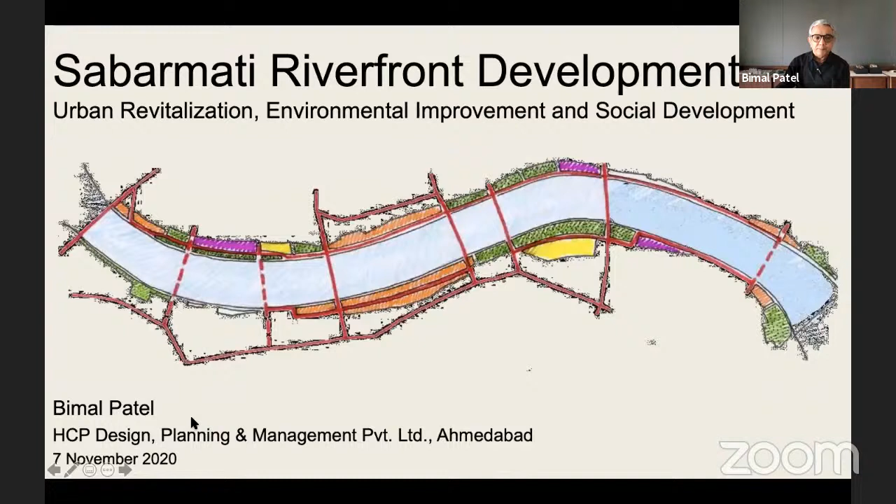So before I start on this project presentation, let me first say something of great importance. Every city is different and every waterfront is different, so I don't want anybody to believe that what was done here can be completely replicated elsewhere. And yet many problems that our cities face, many problems that our rivers and waterfronts face, and issues we have to work on are similar. Therefore, there are also lessons from here that might help in tackling other rivers, other problems in cities.

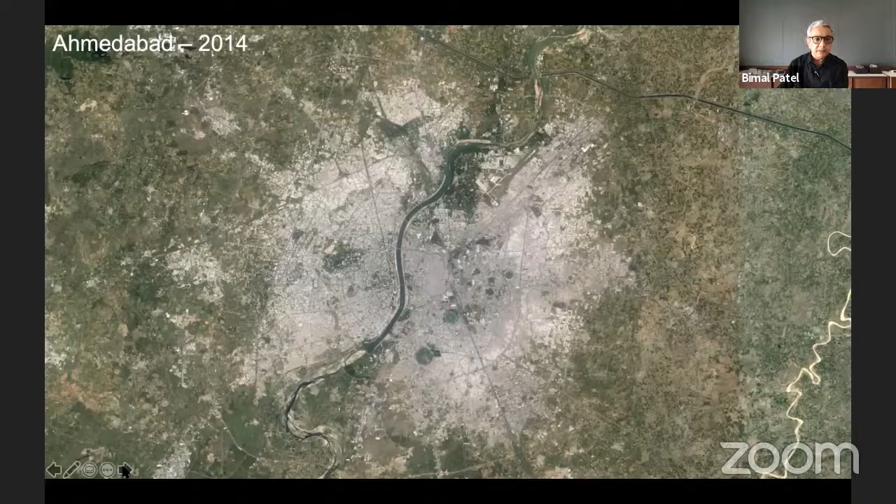The river has always been a place for recreation. This is Shah Jahan's palace on the bank of the river in Ahmedabad.

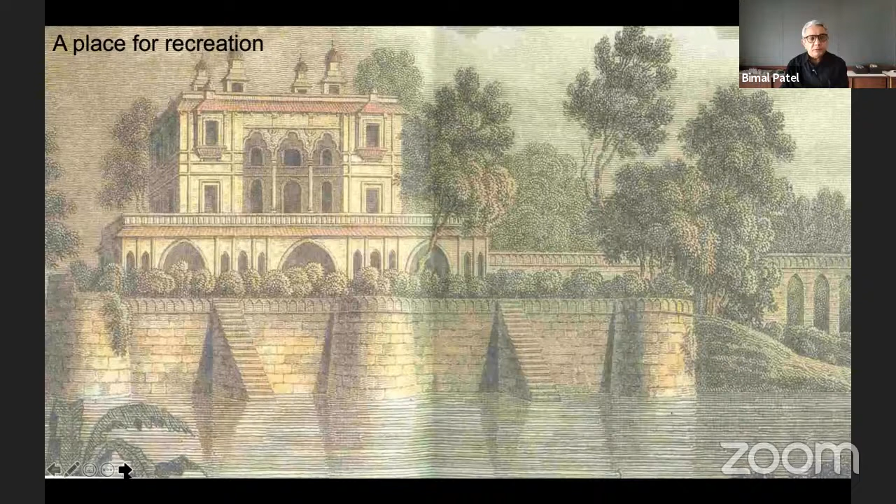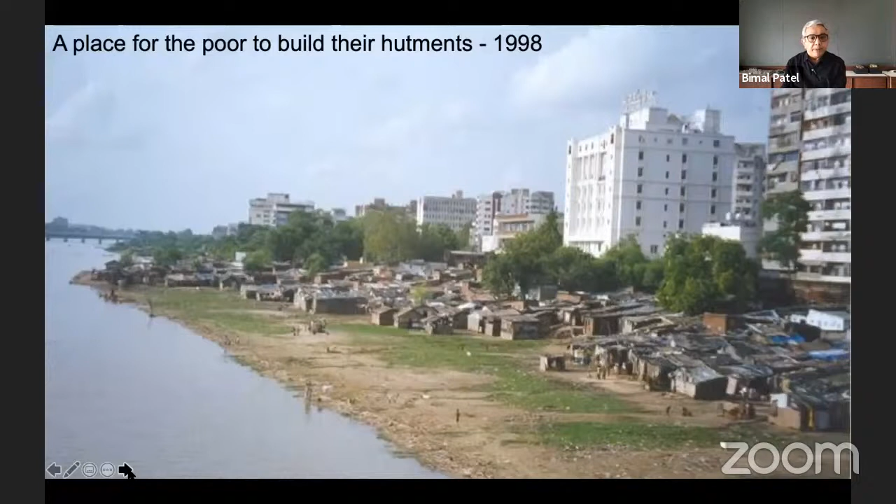Gandhiji built his ashram on the banks of the Sabarmati River. So the Sabarmati River is significant not just for Ahmedabad but also for the country as a whole, because this is where the freedom struggle was forged from.

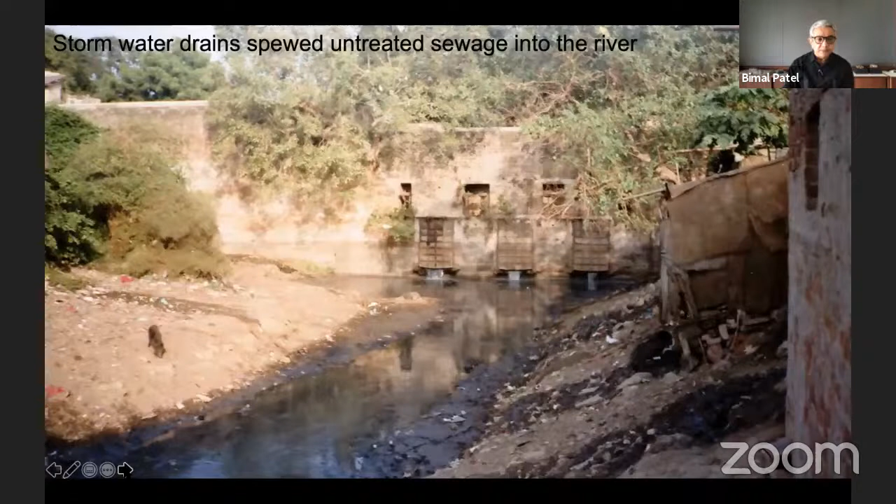And yet, despite it being such an important river, Ahmedabad, like most rivers across the country, abused and neglected it. Over time the river became a place to dump garbage, and through stormwater drains, untreated sewage began flowing into it. Here you can see a nala bringing untreated sewage into the river. This is Dandi Bridge, and below it, this nala is taking sewage into the river.

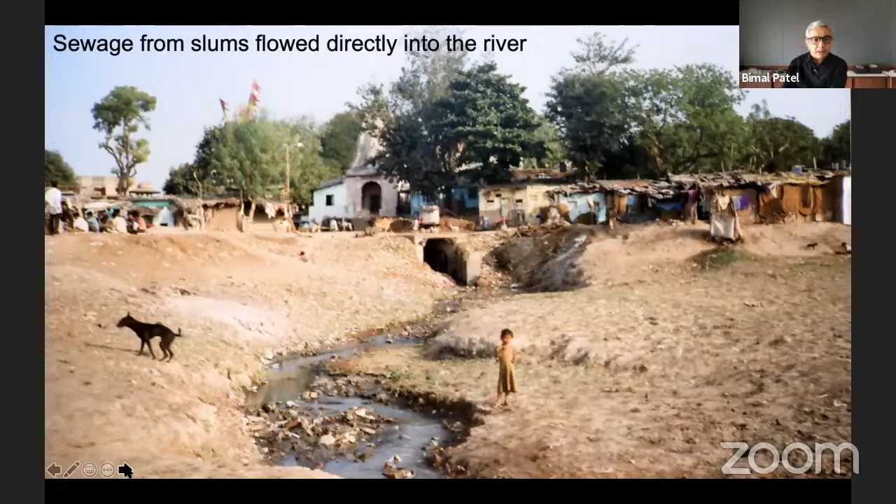The slums on two sides had no services, and of course, sewage from the slums also came directly into the river.

The slums, while they provided housing for the poor, also ended up reducing the flood carrying capacity of the river because there were slums on the banks. When releasing water from the upstream dam, which I'll talk about later, it became very difficult because the slums left no space to discharge the water. The slums constrained the flood carrying capacity of the river.

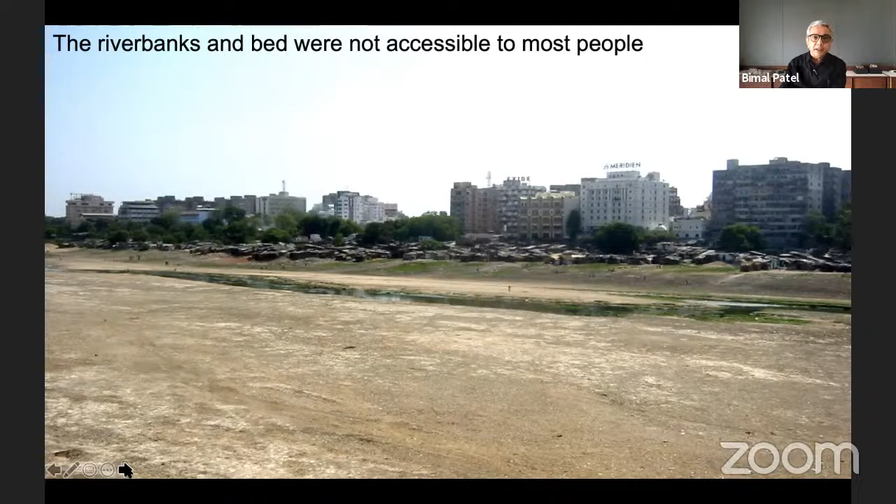Here's another image of the dry river bed, with the edges full of slums and the river turned into a drain flowing through the middle. Wherever you could get to the river bed, it was choked by slums, and the only place the river could be enjoyed from was the bridges. In summer, people would walk up and down the bridges because this was a vast expanse—at least you could enjoy the expanse.

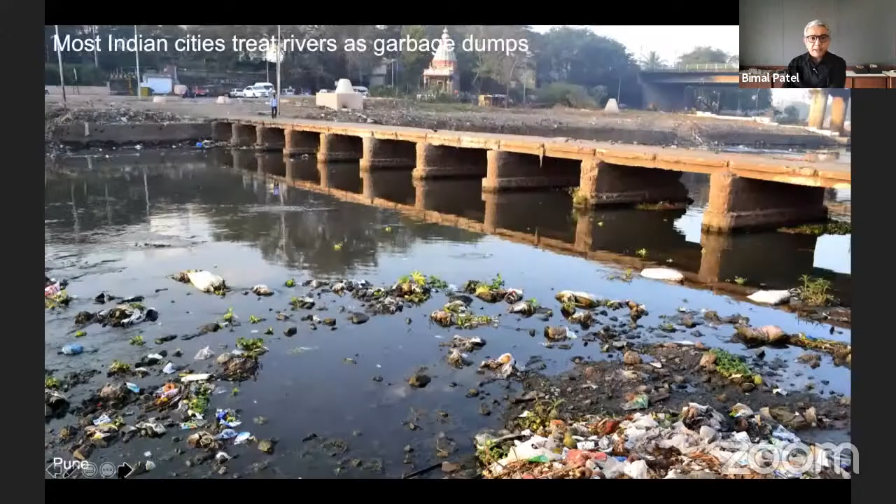Ahmedabad was not alone in abusing its river. This is something you must keep in mind. Most Indian cities treat rivers as garbage dumps and places

where sewage has to be thrown in. Here's the river in Pune. Here's the river in Nagpur. You can see here, it's a complete sewage drain. Here's in Varanasi. The Ganga is also polluted.

And India is not alone. You can see here, this is in China, the Yangtze River. There's so much industrial pollution in the river that the color has turned red here.

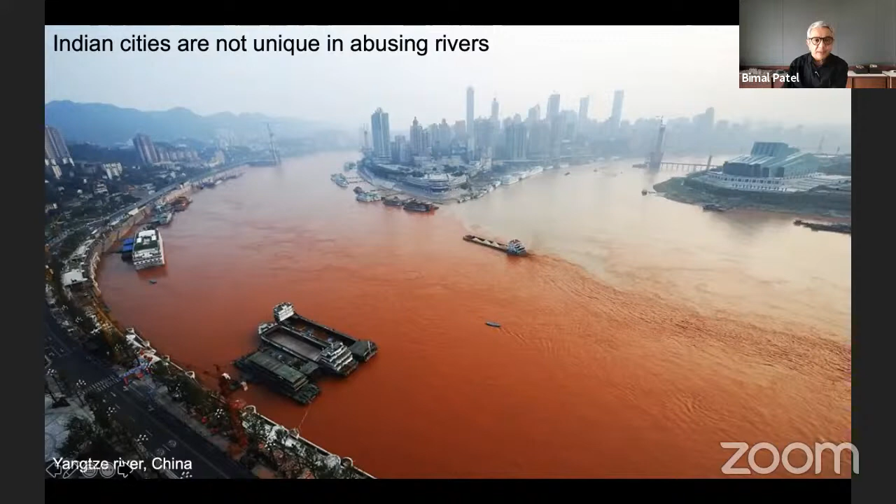Also, we must remember that in the Western world, when they were industrializing, rivers were also much abused and much neglected. This is an image from England. You can see here the pollution from the industries, and you can see the condition of the rivers. This is also in England.

Our cities, Indian cities, are not special in the way they have abused their rivers. Whenever cities industrialize, this problem seems to have emerged in all places. Here's another image of Manchester in England. The rivers were full of sewage and completely messed up.

In contrast, today, if you look at cities across the world, many cities have very beautiful waterfronts. Here, for example, is Paris. Everybody knows that Paris has a beautiful river running through the middle, and on both sides, on the banks, tourists and local citizens gather. This is the place where you can come and spend some time and be inspired by the place. So the rivers today are not at all like they were earlier.

London too has a terrific waterfront. This is Westminster, the Parliament of England, on the river edge here. And New York, you can see it's a great metropolis, but the entire edge here along the water is a beautiful place. The waterfront is lovely. You can find places like this in New York, in such a metropolis, along the water to promenade, to walk, to jog.

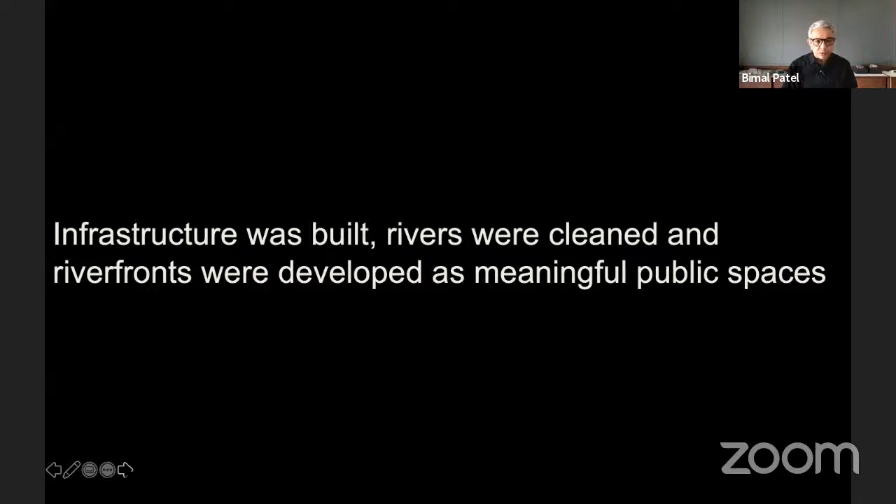What we must keep in mind, especially as architects and urban designers and planners, is that these waterfronts, these lovely waterfronts that I showed you of cities across the world, did not always exist. Infrastructure was built, rivers were cleaned, and riverfronts were developed as meaningful public spaces. God didn't endow the countries of the Western world with beautiful waterfronts to start with. They were all created by people.

Here's an example which shows you. This is London in 1795, situated on the River Thames. You can see here this building called Somerset House. It's a tidal river, and the buildings used to be built right up to the edge of the river. Here you can see a place where the boats could go directly into the river, into the building.

Here's another view of the same river, 1817. Somerset House is to the left-hand side here, the tidal river here, and the boats could go directly into the building. But you see, London by this time was already industrializing, and there was lots of sewage and muck and garbage coming directly into the river from the city.

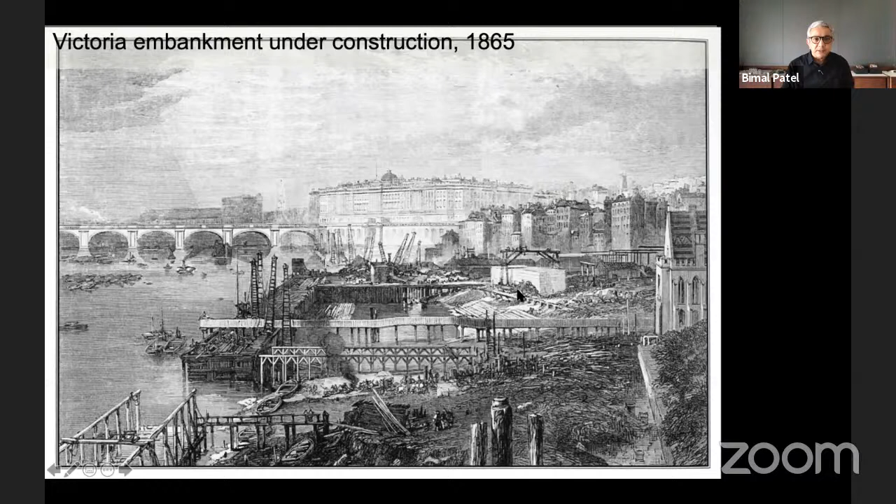Once again, this is the same view, near Somerset House here, and you can see the embankment being built. Victorians were great city infrastructure builders, and here you can see Somerset House once again. By 1875, they had built an interceptor sewer to stop the flow of sewage, and they had built an embankment and created a sort of public realm along the Thames River.

Slowly this kept getting built, the trees started growing, and here you can see a view with grown trees. You can see the Victoria Embankment here, near Somerset House, with a view of the river. Slowly the river was made clean and the edge of the river was improved. Today if you go, that's Somerset House, and there's a bust of Bazalgette just at this location. This is the embankment you can see today, and it's a beautiful place that tourists go to.

It's the same with New York. New York used to have an industrial waterfront, with places for ships along the water. Today it has a waterfront with parks and gardens, turned from an industrial area into a different sort of area. Here you can see all the jetties coming out in New York, and this is Battery Park. At one point the industry was taken out of here, and once it moved out, they turned it into a new development with a terrific waterfront. Here you can see next to the Twin Towers when they used to be there, the land where the jetties used to be, and here you have what was built in its place.

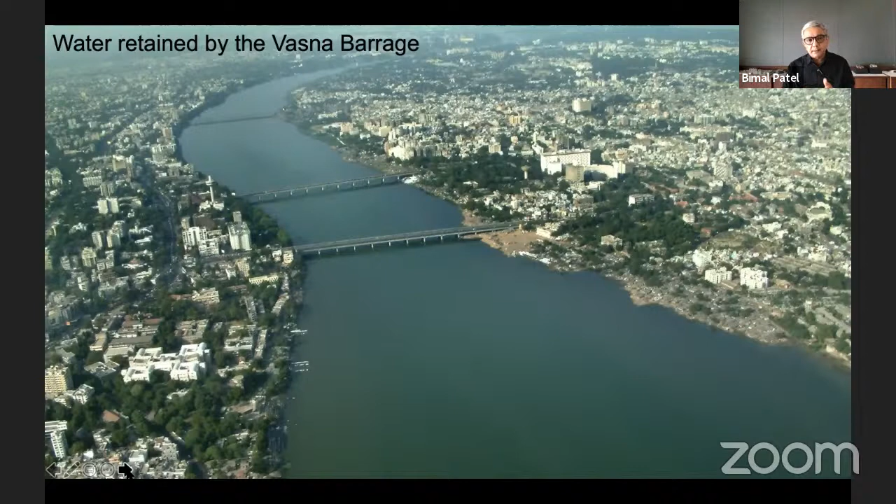And once it emptied out, the bed would be like this again: a dry, sandy bed with a trickle of water in the middle, mainly sewage going through the middle. You can see Ahmedabad here. This is from the early 1980s.

Another important regional development was the building of the Narmada Dam. The Narmada River flows from Madhya Pradesh into Gujarat, and the Narmada Dam is built here. There is a canal that goes all the way from the Narmada Dam, past the Sabarmati River, and on to north and western Gujarat.

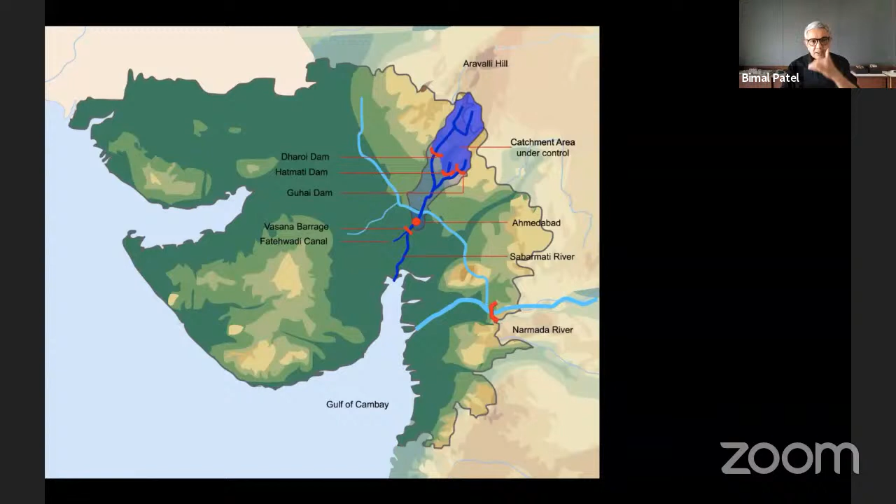This canal, just above Ahmedabad, is where it bisects the Sabarmati River. So here you can see the image of the canal. Excuse me for a second, I'm going to move this here. So here you can see the river that goes north to south. That's the whole river. This light gray area is Ahmedabad city.

Here you can see the Vasna Barrage that has been built, and this is the water held in the river because of it. Water would be held for 15 kilometers. To understand this, you must understand that the river slopes as it goes down, the land slopes. They've built a wall here, so this is like a swimming pool. At this end you have the deep end of the water, at this end you have the shallow end.

This is the irrigation canal through which irrigation water is given from the Vasna Barrage, and here you can see the Narmada Canal. When canals like this are built, a siphon is always provided for releasing water from the canal into the river, serving irrigation purposes, and also so the canal can discharge water quickly during a big flood in the dam.

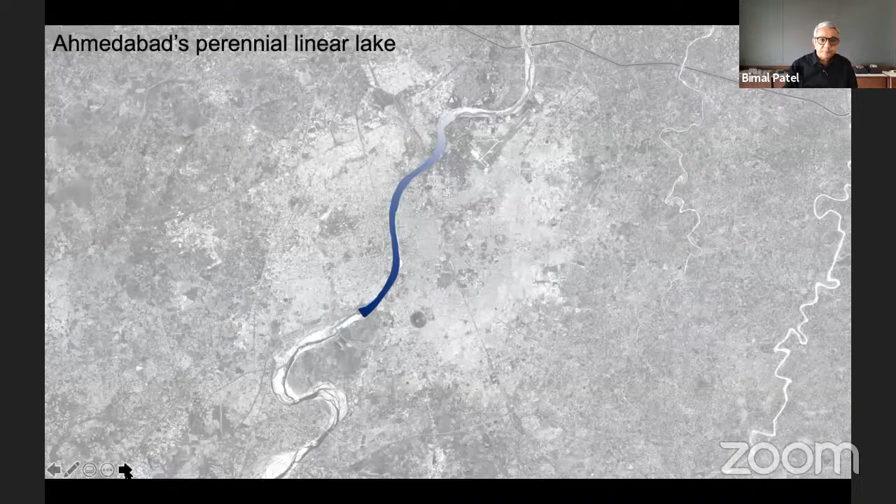Ahmedabad's landscape is dry, but it used to have many lakes. As the city grew, many of these lakes were covered up, as often happens when cities grow in a haphazard, unplanned manner, and these lakes get destroyed. You can see this entire landscape used to have man-made lakes.

There were some of these which were actually quite significant - Ahmedabad had a big lake in the middle of the city. These were all sorts of lakes near villages, and some of these, like this round one here, were built as tanks, and Kankaria Lake or Sarkhej Lake were tanks built during the Muslim rule. Here you had one more linear lake in the middle of the city.

You must remember that this lake we saw earlier was done in 1976 - Ahmedabad's barrage was built in 1976, and the Narmada Canal was built. Now, all of this happened without any reference to the riverfront project.

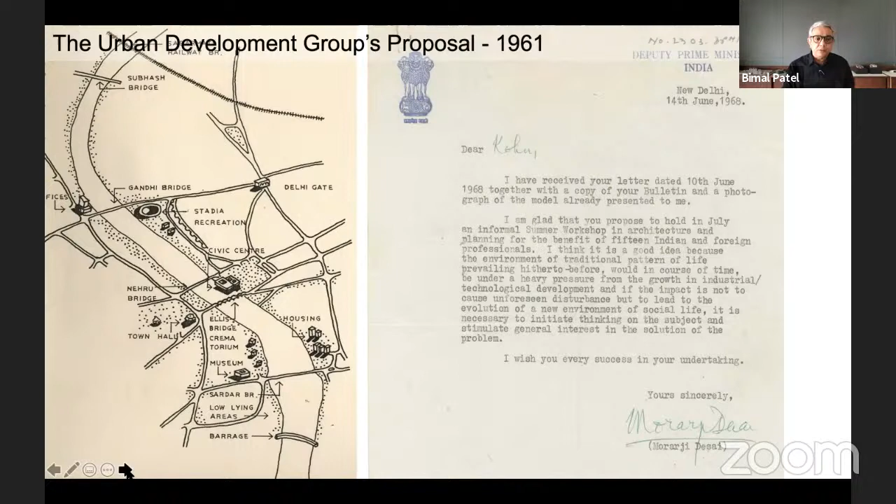Ahmedabad had talked many times about a riverfront project. One of the earliest times was in the 1960s, when a French architect living in Ahmedabad had proposed that the bank should be developed. It's not a surprise - he came from Paris, he knew how rivers could be transformed, and talked about that here.

In 1976, a group of professionals in Ahmedabad had also proposed doing the riverfront development. But it's only in 1997 that the Ahmedabad Municipal Corporation became serious about developing the riverfront. Here you have the formation of a company at that time called the Sabarmati Riverfront Development Corporation Limited, established by and 100% owned by the Ahmedabad Municipal Corporation.

The company had a board of directors led by the municipal commissioner. There was the mayor on it, the leader of the opposition was also on the board, various other citizen members were there from the city, and there was also the collector of Ahmedabad and various other people. So all the stakeholders necessary for implementing the project were brought onto the board, and the company was given the task of transforming the river and doing the riverfront project.

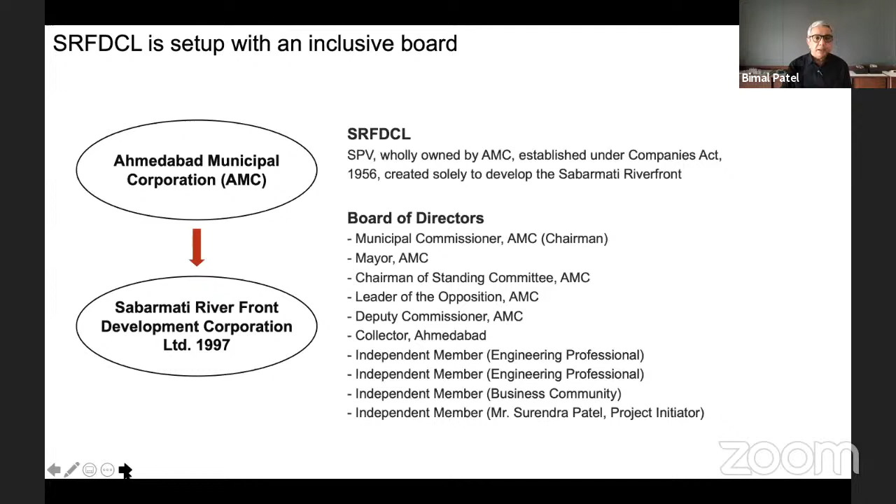I got involved in this project in 1996 when we were asked to first develop a comprehensive master plan, which of course looked at all aspects of the river, from its physical features to river hydraulics, meaning the flow of water and flooding, land reclamation, embankments, land ownership. It was a complete comprehensive look, not just an architectural or urban design study of what the river should be. It asked questions like: what will we do about the slums? What will we do about the sewage? How will we pay for this project? Everything had to be answered. This project was not done just as an architectural project.

Later on, after the master planning phase got finished, my role shifted to that of being the manager for the project. This also was done professionally, and we provided professional management services for strategizing the project, for getting regulatory approvals, for promoting it, and doing everything necessary. So it's an environmental improvement, social development, and urban rejuvenation project.

Let me explain what that means. The project didn't have one objective, it had multiple objectives. Urban projects are like this - they are complex, they must do multiple things, they cannot do just one thing. This project had 11 objectives, and let me try to explain what they were.

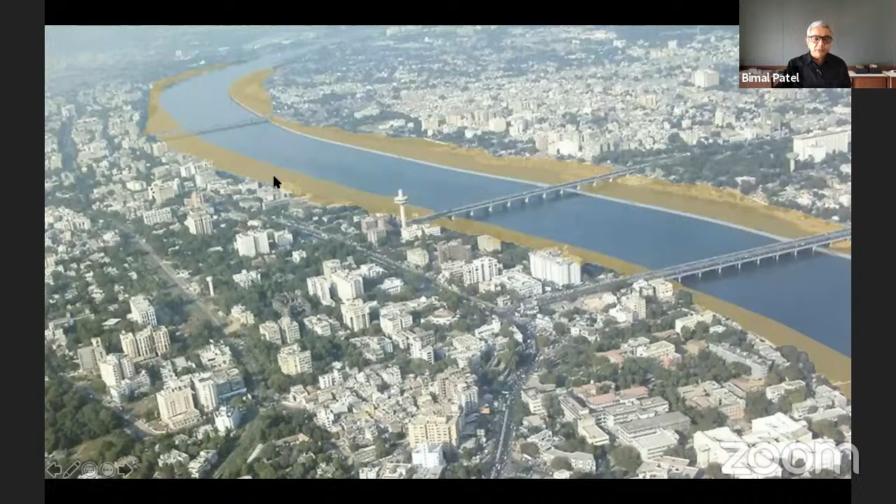What we decided was to train the river, which is to narrow it by building embankments and reclaiming land from the bed of the river. This is exactly how Marine Drive was built, for example. And here you have a sort of narrowing of the river.

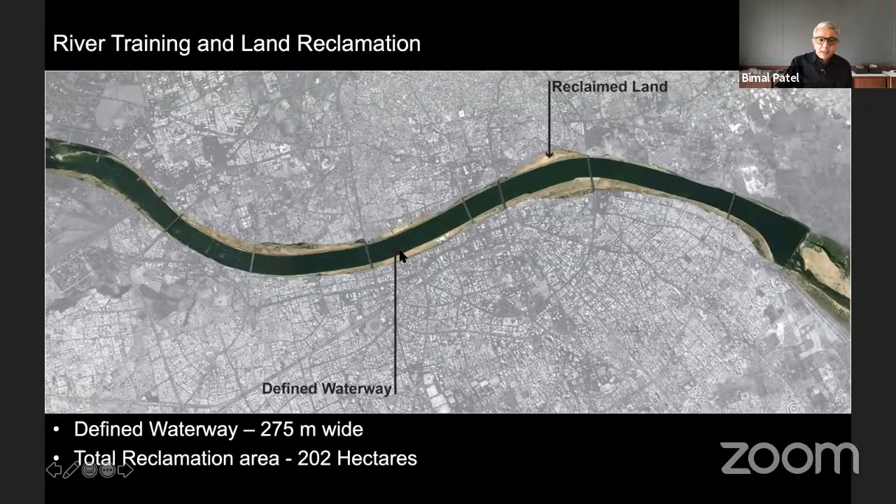And here, what we did was create a sliver of land by narrowing the river, and you can see a defined waterway of 275 meters was done. This was not just some line drawn by some urban designer or architect - this drawing, narrowing the river in this manner, follows complex engineering studies of river hydraulics. So we worked with hydraulic engineers to define what the waterway could be.

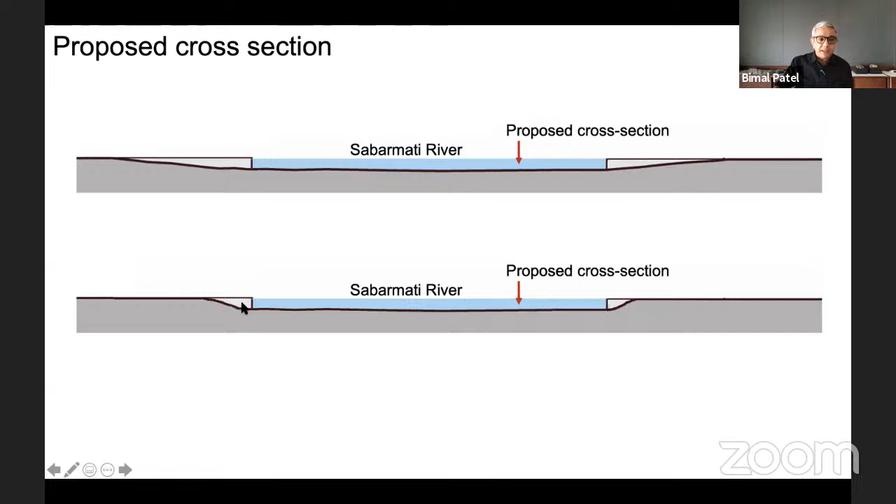You can see here a cross section of the river where it was wide in some places and narrow in others. Essentially these embankments were built on the two sides, and the proposed cross section of 275 meters remained in the middle. Where the river was wide, we got a lot of land. Where the river was narrow, we got less land. So here is how it was done.

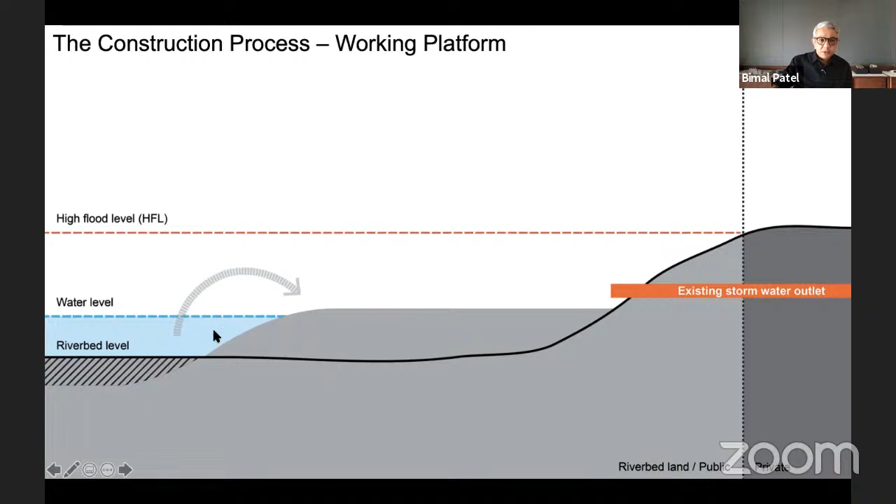The pumps are pumping water and sand onto the side. The water flows back, the sand remains there, and soon you have a construction platform on the side.

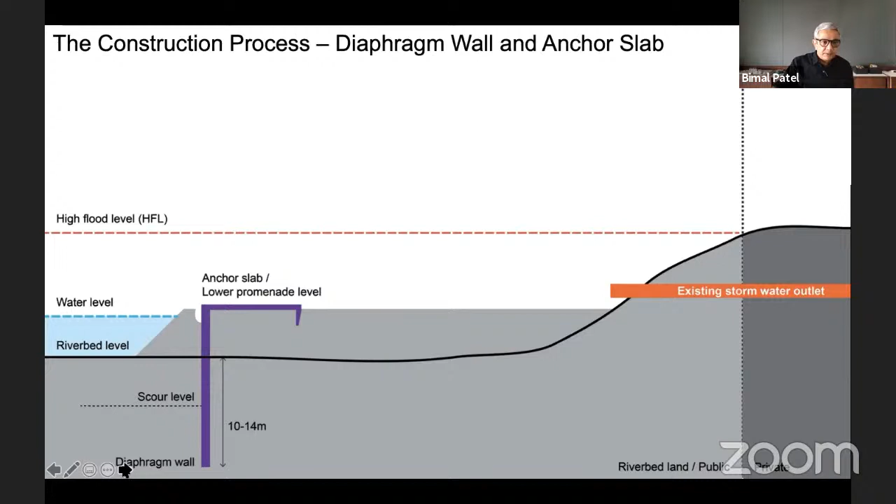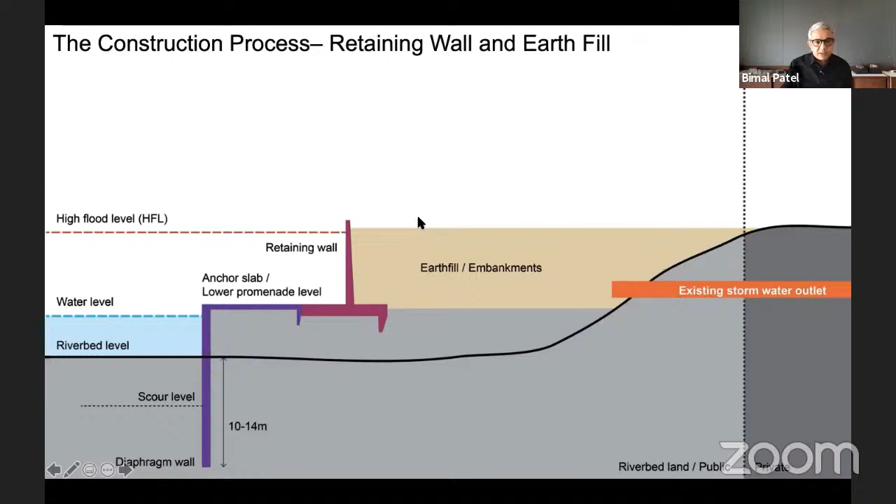Once the anchor slab was built, a retaining wall had to be built up to the high flood level, and with sand essentially taken from the river, we created the embankments, up to the height of the high flood level.

So here we are. This is the building of the retaining wall. You can see here, here's the retaining wall being built. This is not rocket science. These are local methods; this doesn't take a huge amount of technology.

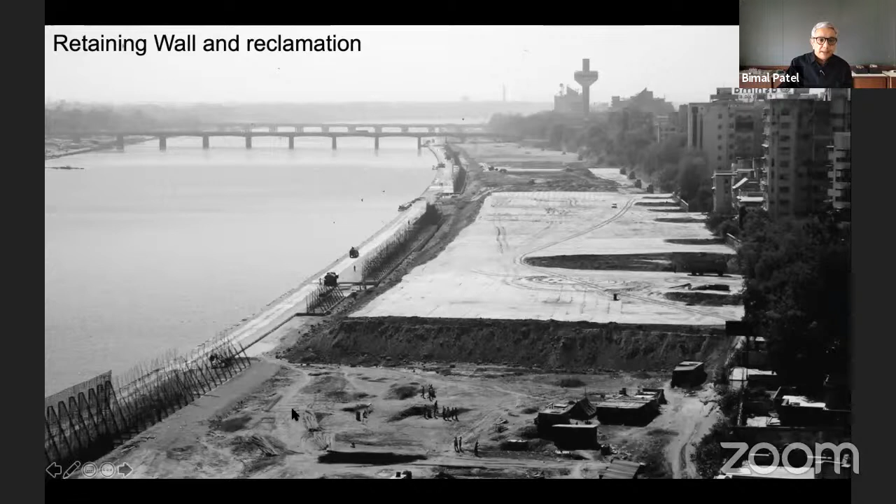Here is the embankment. This is the sand taken from the riverbed and put into this area here. And this is the land that is being created on one side, and that's the public realm of Ahmedabad.

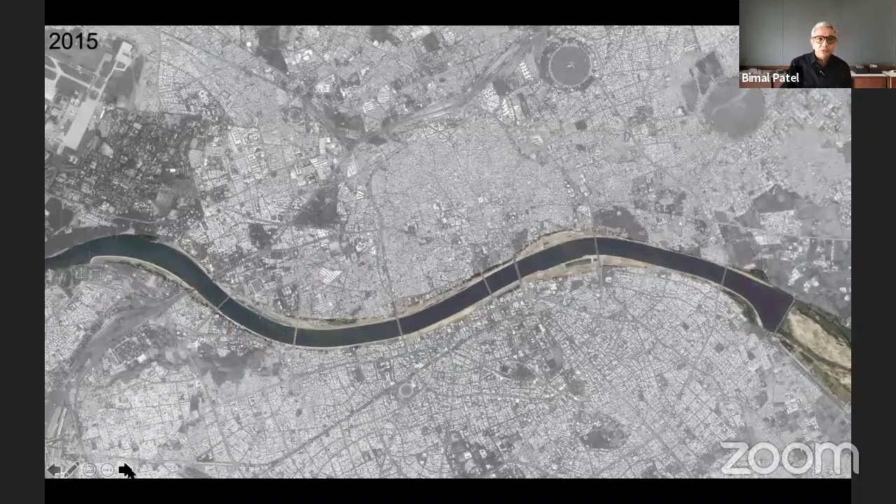Here you can see 2006. Some of the land has been reclaimed here, and the embankment is being built. 2007. Now in 2009, 2011, 2013, you can see there's development on the two sides, 2015, and yes, this is 2020.

So the project has essentially converted a private river edge into a public river edge. It is a great project of socializing what used to be private, making it a social asset.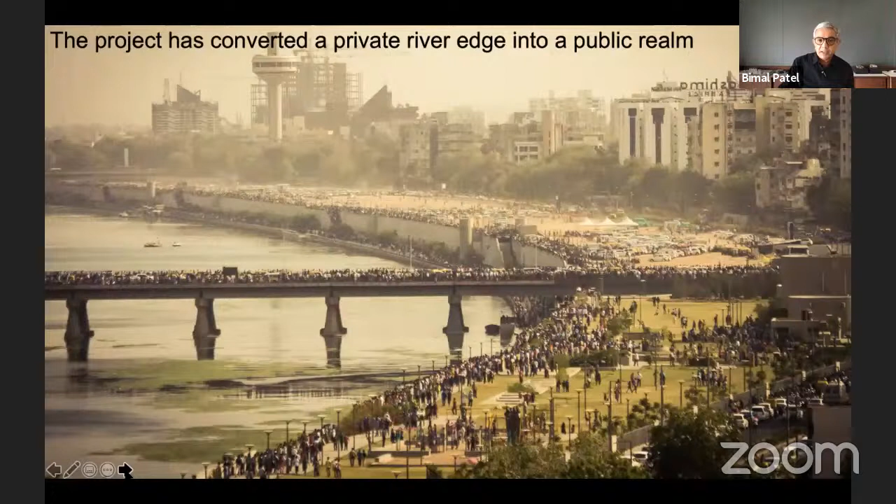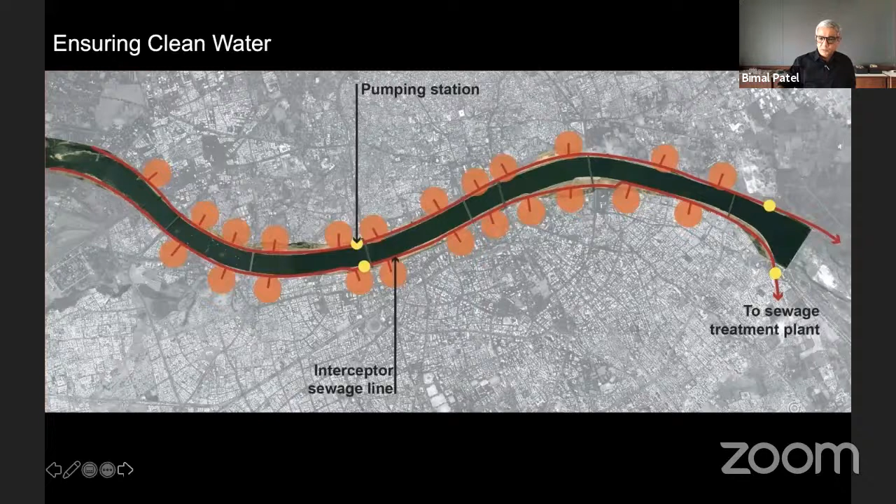So essentially what was done was an interceptor sewage line was built on two sides to collect all the sewage and take it to the two sewage treatment plants at the end here. There are two sewage treatment plants here. So all the sewage was collected and taken there.

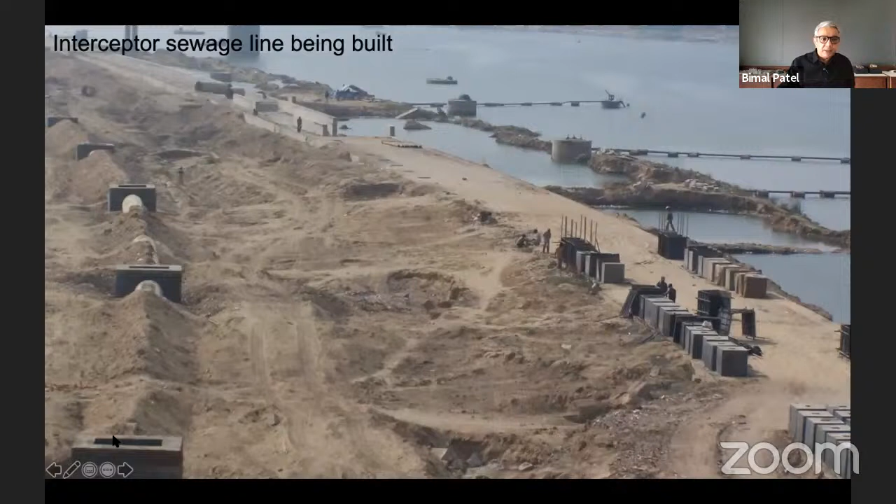It is 11 kilometers long. Here the sewage pipe is being laid while the embankment was being done. This is the sewage pipeline with the manholes, as you can see here. And the flow of sewage into the Sabarmati has more or less stopped. There is one place where there is still some work pending.

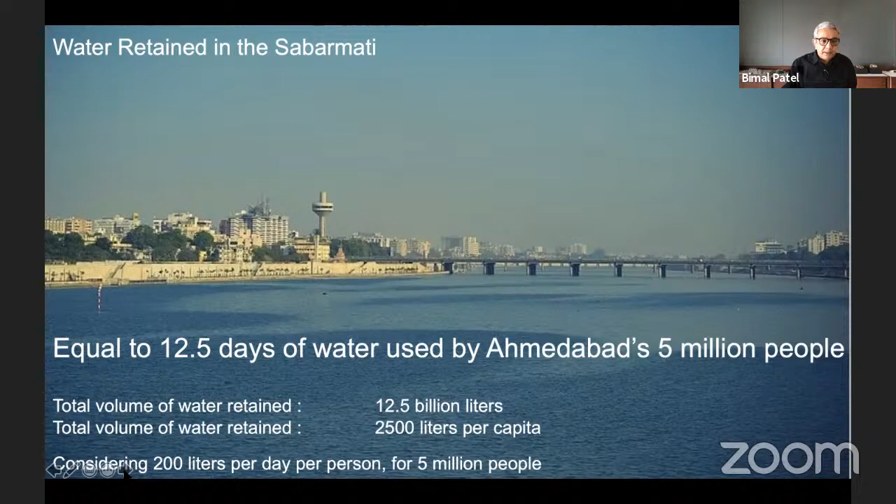Once that gets done, it'll be a totally sewage-free river. The third objective was to recharge groundwater into the city. Now you can see that water is stored here, and once the sewage is removed, it's clean water. But this water is daily percolating into the bed of the river, and some of it is getting evaporated. So every day, about 750 million liters of water is lost.

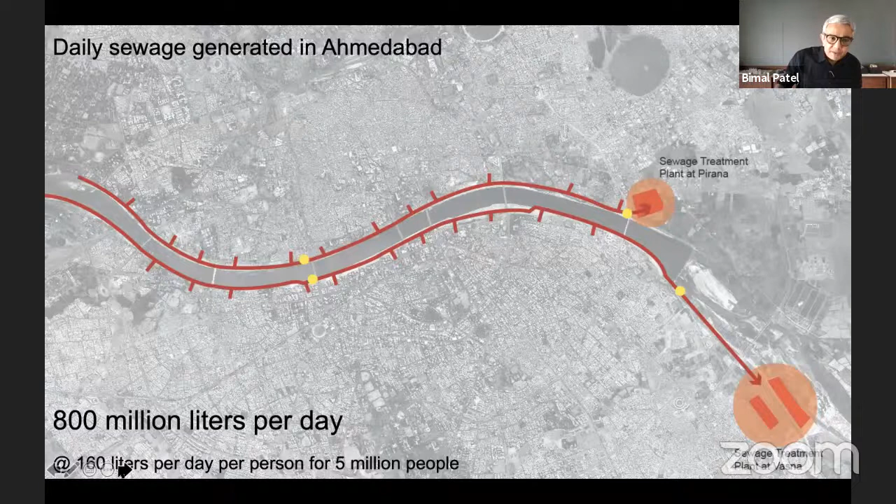Today, that water is coming from the Narmada Canal. Every day, there is water from the Narmada Canal filling up the lake of Ahmedabad. But eventually, what is going to happen is that the sewage treatment plants will actually treat the sewage of Ahmedabad and produce enough treated water to replenish the water that is lost to evaporation every day. So from the sewage treatment plants, the water will be put here. Eventually this project will be just basically a grand recharge project, a water recharging project.

So Ahmedabad sucks water out of the ground, uses it, turns it into sewage, sends it to a sewage treatment plant, and the treated water is put back into the river, and then the cycle continues. So it's a completely sustainable way of having a lake in the middle of the city.

Presently, Narmada water is coming because it is free. And so soon now, the Sabarmati riverfront will not be getting Narmada water. So more and more, it will be relying on treated sewage to have the lake in the middle of the city. The fourth objective was to provide housing for riverbed slum dwellers.

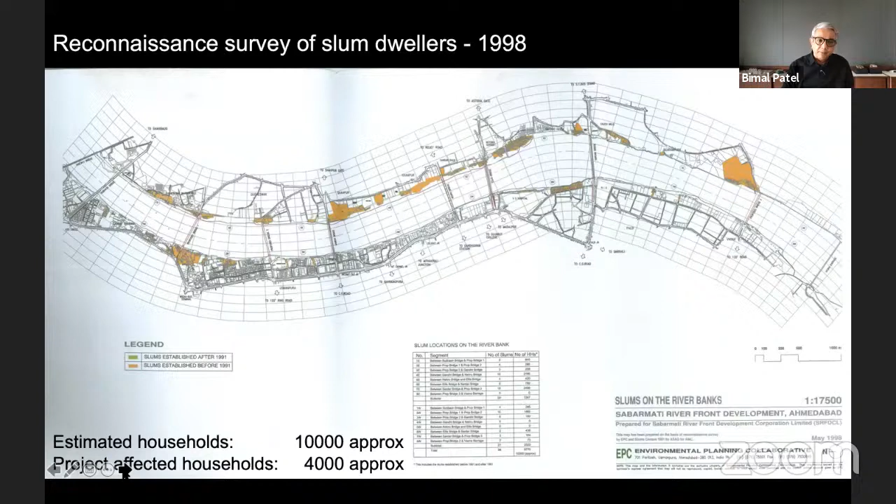So we studied all the slums on both sides. They had approximately 10,000 households. Not all of them were in the project area. About 4,000 were in the project area. There's a very detailed socio-economic survey that was done, valuation of all the assets of the slum dwellers.

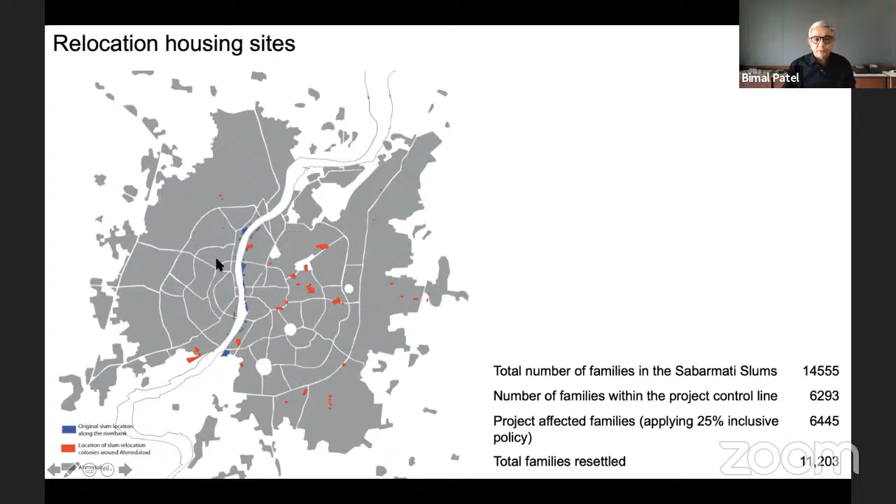And a scheme was worked out so that the people living in these blue slums you can see here were essentially given housing in where you see these red plots are. These were open lands belonging to municipal corporation. Housing was built there. Eventually, a total of 11,000 houses were built, and the people were moved from the slums in the river to these houses here.

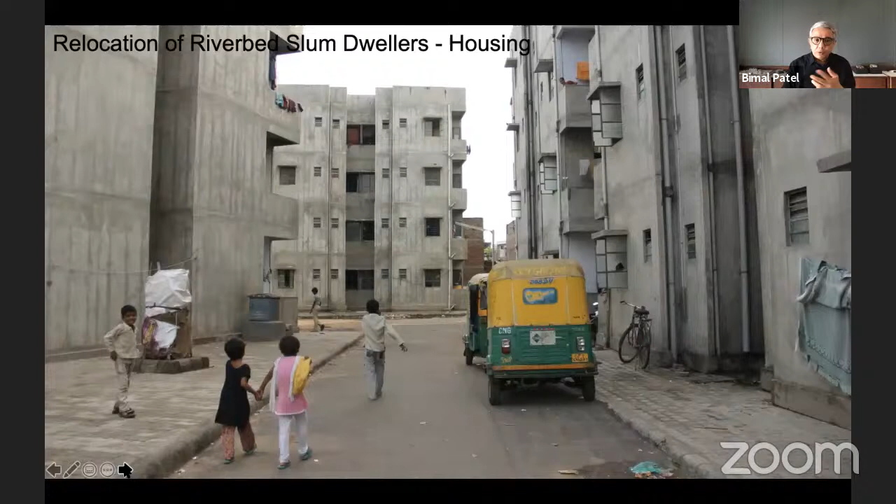We were not directly responsible for design of the housing. I think a much better job could have been done, but nonetheless, this was far better than the slum conditions the people were in. Of course, initially there was resistance, but slowly people understood the benefits and reaped the benefits of moving to a house that they owned and which had services, water supply, drainage, and it was a healthier place to live in. The fifth objective of the project was to reduce the risk of erosion and flooding.

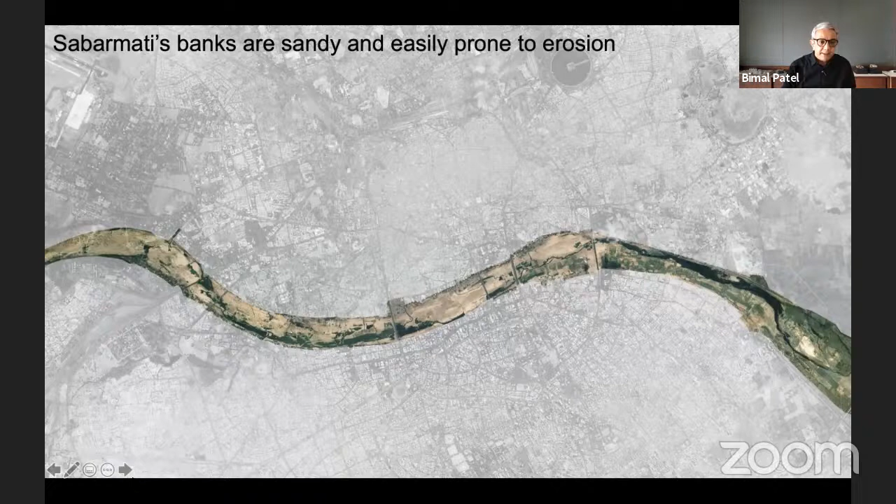As you can see here, there were some areas of Ahmedabad that were low-lying, like this Paldi area here, and Sabarmati River's banks were all very sandy, and when big floods like this would come, the banks would get eroded. And anybody who could afford it had built walls such as this. You can see here all these housing colonies, flats, etc., had individually built walls.

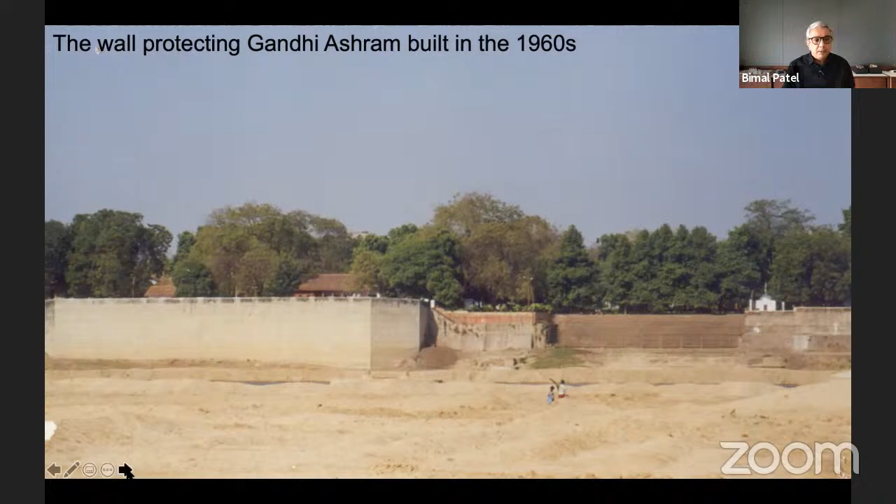Here you can see walls, the big wall in front of Gandhi Ashram. If this wall had not been built in the 60s, Gandhi Ashram would have got washed out. Everybody was individually building walls. Now, with the building of the embankment, we got one common wall for Ahmedabad.

The sixth objective was to create riverfront parks and promenades. Ahmedabad is a big city, it lacks many parks, it's a dense city. So a lot of land got created here, and almost 50% of the land was parks and promenades.

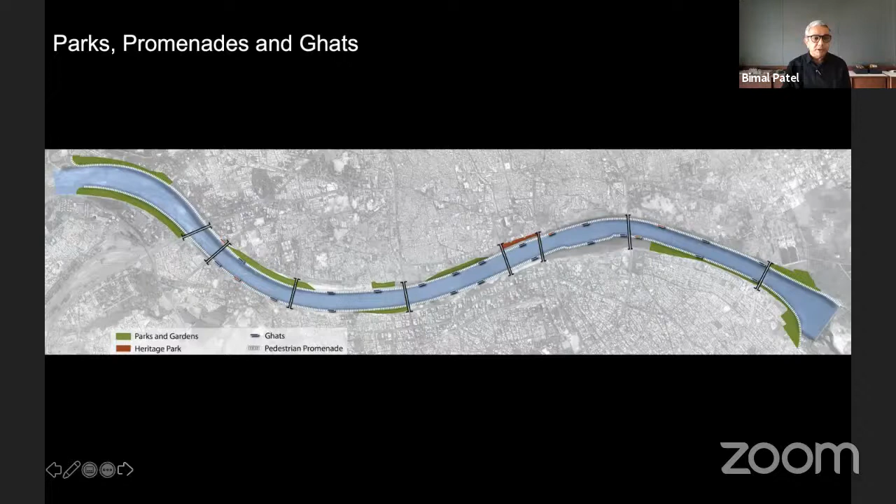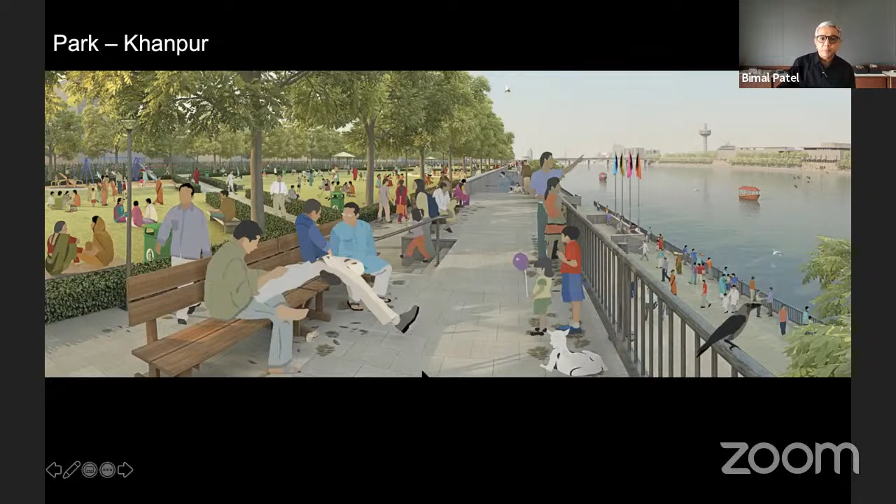Here you can see the revolving restaurant of Ahmedabad, the lower promenade, and a visualization of the parks. In this place, which had got built and the trees had not grown, we drew this sort of an image to show what the lower promenade would be like. In this place near Gandhi Ashram, here's a visualization.

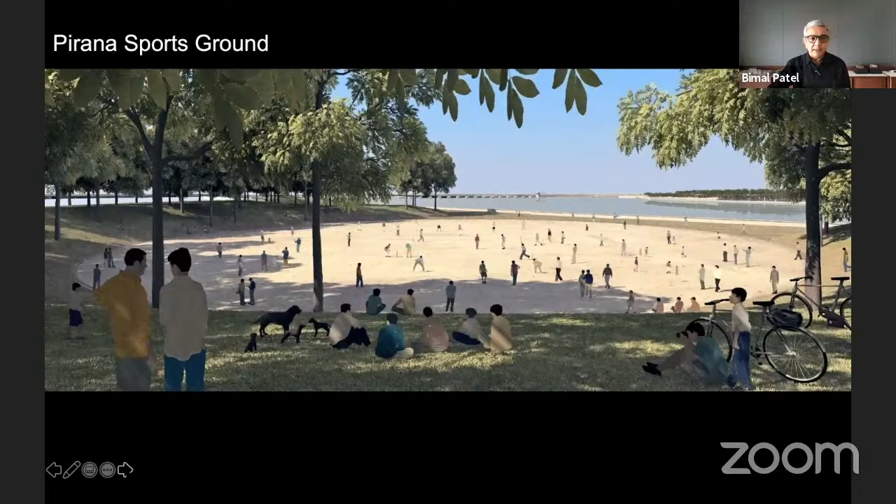These were very detailed visualizations - we made 20-foot wide panels to show to people. This is the Gandhi Ashram steps, and we said someday it's going to be like this. And here is a big ground at the far end of the river, which we said could have a play field of this sort. So these were renderings drawn up at that time to show what people would see.

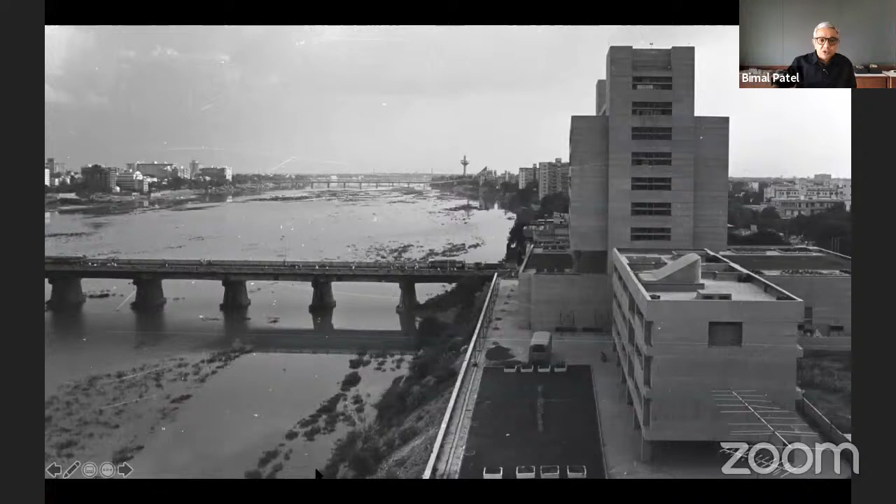I go back here - that's the Reserve Bank of India. You can see this used to be in the 80s what the bed was like, and this is what it is like now with a public edge and still getting developed.

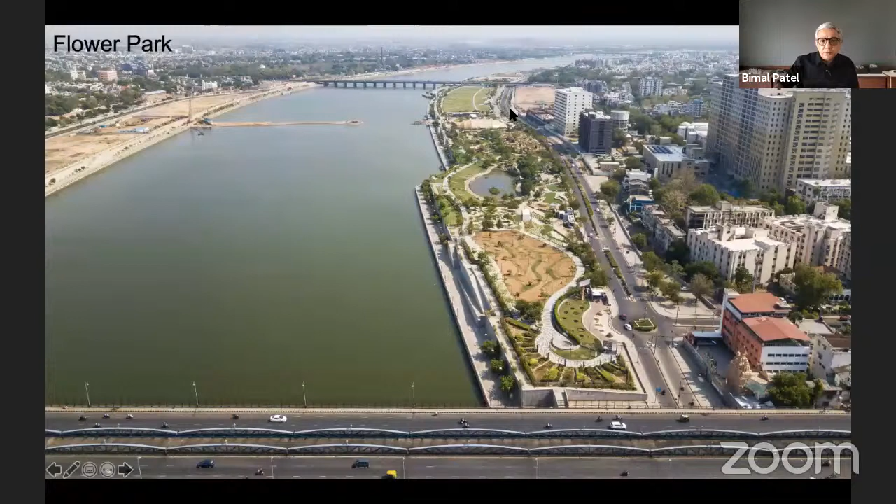That's a park on the edge of the river. Here's another one called the Flower Park, as you can see here on the right hand side, with a big structure - a greenhouse structure. And here is the flower park during the flower festival.

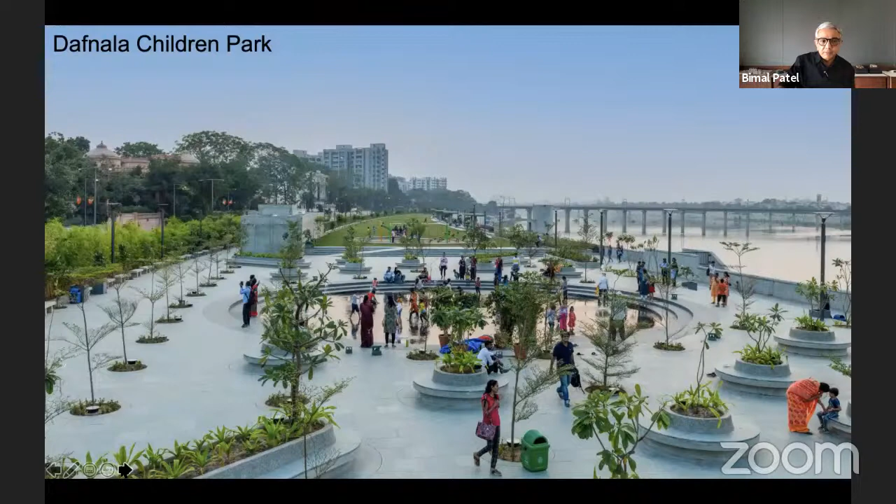Here's an event garden, a huge place where large events are held, and that's the event garden at night when it's lit up - it's become a place. Here's the children's park along one side of the river, and at one end you can see a fountain created there for kids to play. The Riverfront project has added almost 1 million square meters of parks in Ahmedabad.

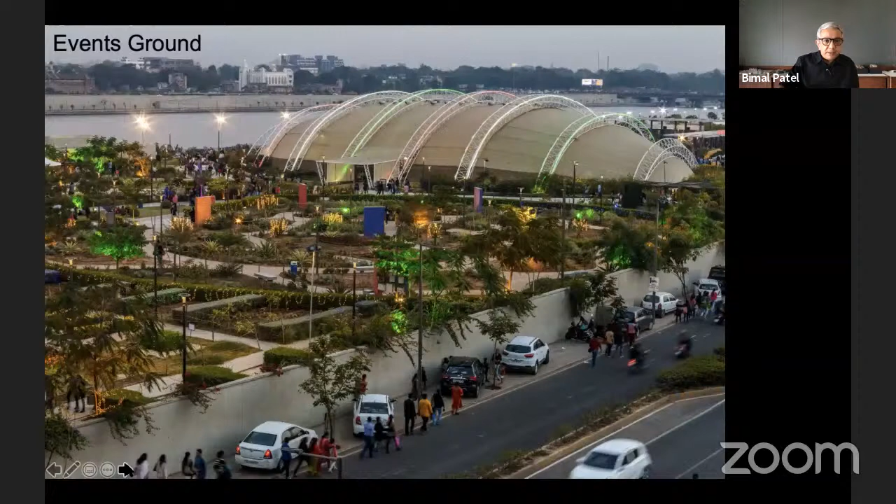The seventh objective was to create trade and cultural facilities. Here you can see where there was a wide riverbed, there was a possibility of creating a trade fair facility, and so this is the trade fair complex that has been planned. This is the event ground that has come up, and here's another image of the event ground across.

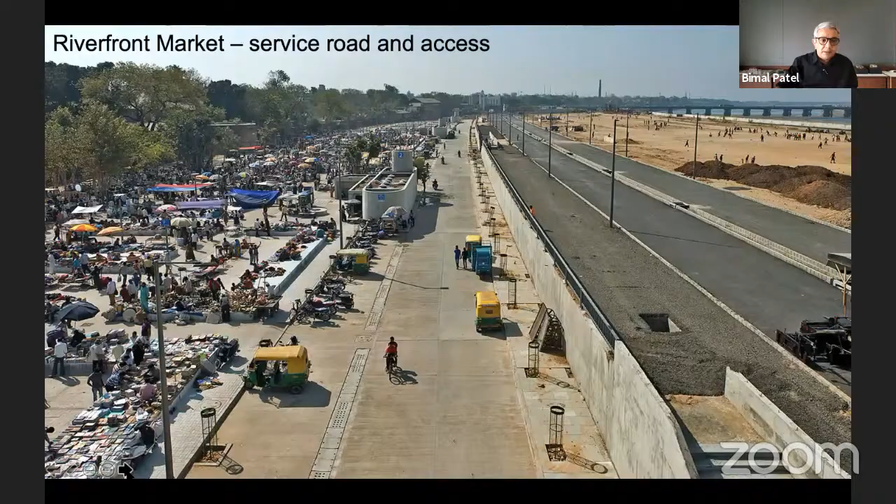On this side you can see there used to be a small flea market I talked to you about. This has been converted into a large market for poor people, with almost 1600 vendors selling their goods here. This is the entire Sunday market of Ahmedabad. Here you can see the market on Sundays - this is a poor people's market.

This isn't something specific, but the entire place has trees planted and will soon be a completely shaded place. These are pictures from at least 7 years ago. So here is the riverfront market.

There was a lot of clothes washing along the river, and a special laundry complex was created for the people who used to wash clothes. You can see here these are the people. Now they've automated their laundries because they have a secure place and proper water supply and drainage.

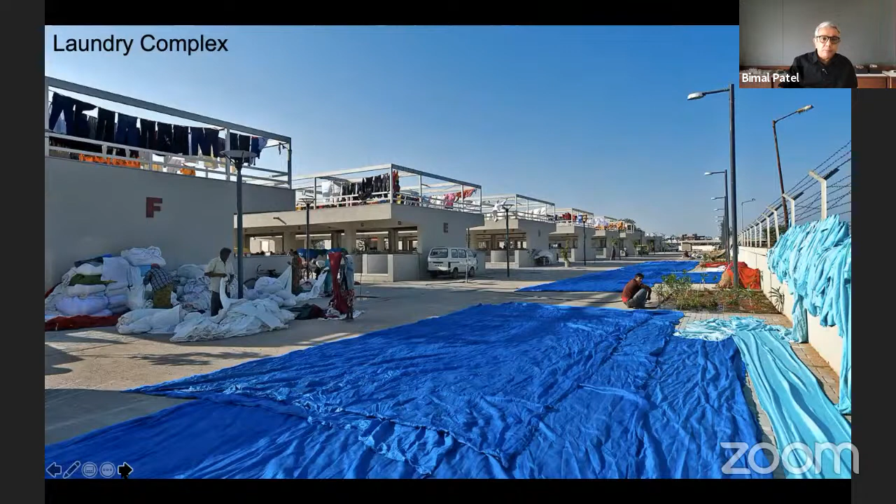Here's a place where a sports complex is being built. Sports fields are being built here, as you can see. This should be ready in another few months and ready for use, with tennis courts, etc. Here the project is adding many trade and cultural facilities.

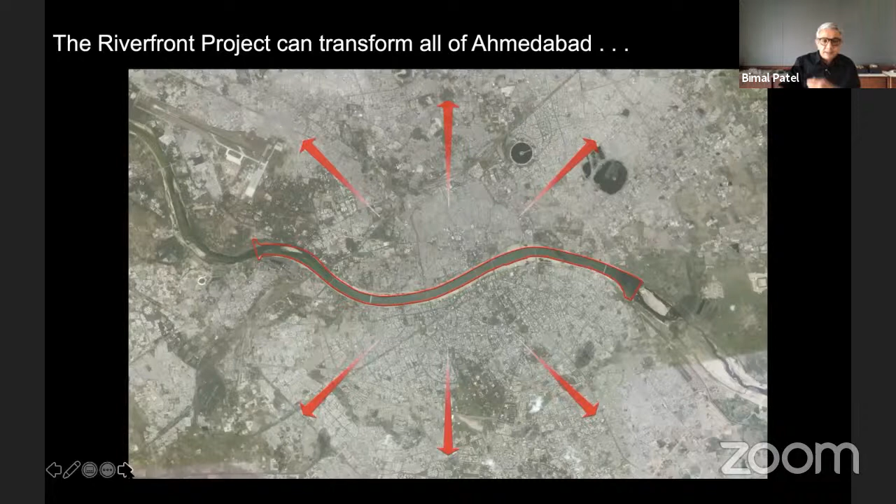The eighth objective was to revitalize the riverfront neighborhoods. Once you do a riverfront like this, the adjacent neighborhoods on both sides get revitalized. Plans have been made for revitalization of the riverfront. That is the Ashram Road area where densification has been planned.

You can see this is what the riverbed used to look like in the 80s, and this is what it looked like a few years ago. Many of these buildings have started coming up. These are just visualizations, but this one is not - you will see it later on.

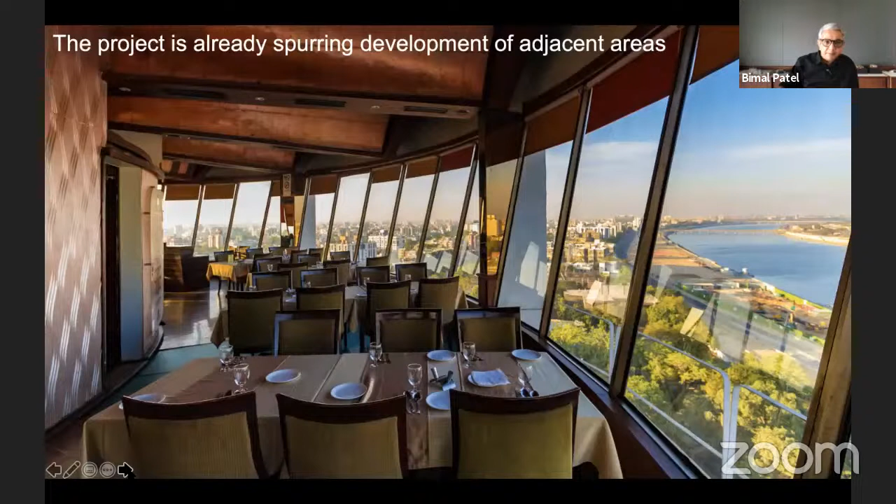Soon both sides will get high-rise buildings, not at all places, but in a few key places, and this will become the business district of 2030. Already you have places like this, and the riverfront you can see on the right hand side from here.

The other idea was to improve Ahmedabad's street network. It had a very poor street network along the river - this is the north-south connection, very poor. So these two roads were added, which has immensely helped the movement of traffic in the area.

You can see here the crossroads that have been added - the road on the western side, and the one on the eastern side. Wherever possible, the road was kept towards the inside, and the edge had parks and gardens like you see here. In other places we decided to keep the road on the outside.

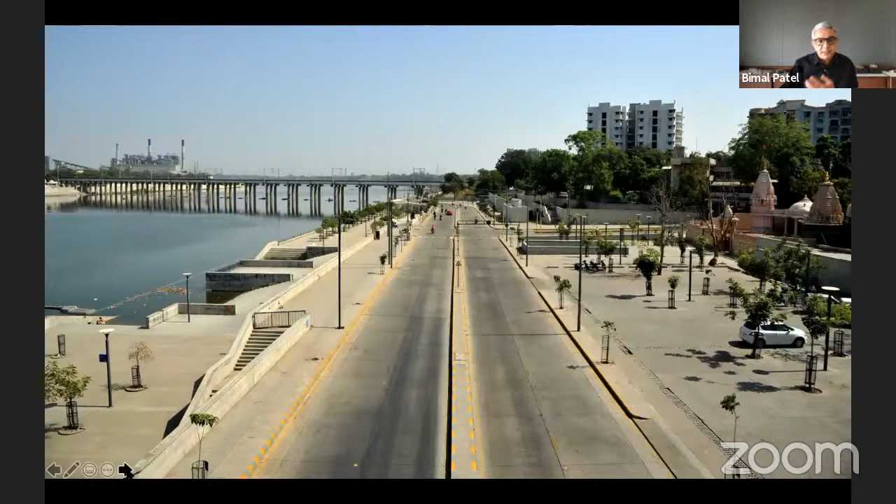This is not a huge road, it's just a 4-lane road, and this is what it looks like. You can see most of these trees have now grown, and it's a different place altogether. That's the street, and that's another area where the street is.

The 10th objective was to pay for the riverfront development. As you can see, the project is designed to fully pay for itself from the sale of a portion of the reclaimed land. Initially, we thought we would have to sell about 20% of the reclaimed land to pay for all the expenses of the project. So the project does not use taxpayer money - this is really an important aspect of the project, and it's why it actually got built.

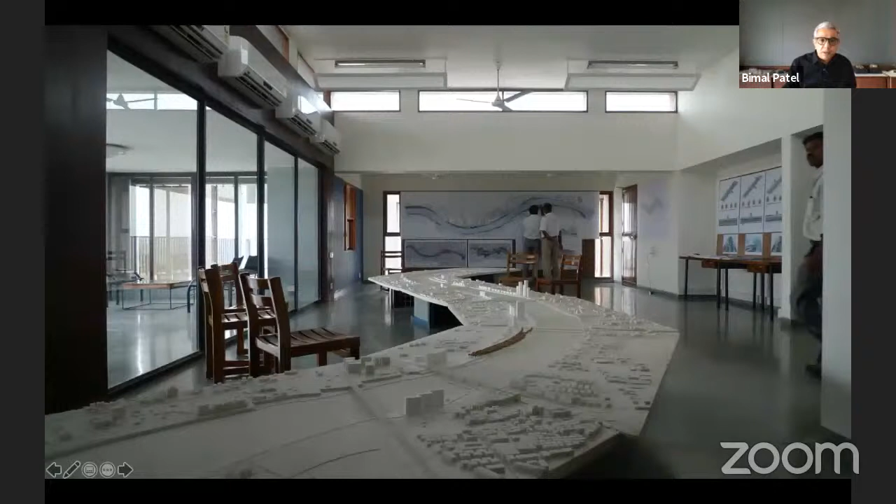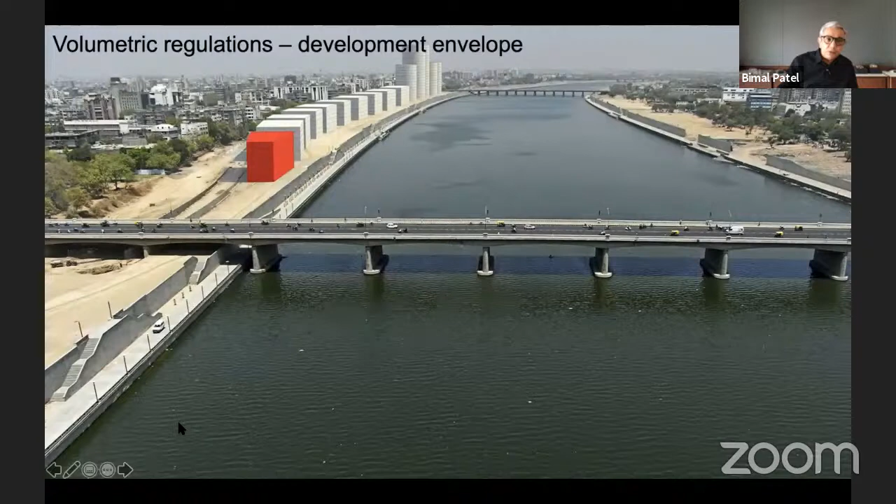For these, we made a big model to find out what the buildings along the riverfront would be like. You can see here some volumetric bylaws have been done. This one building has actually been built on this red colored plot. We defined this as the area in which it was to be built, and you can see here the volumetric guidelines that tell you how much volume you can build within.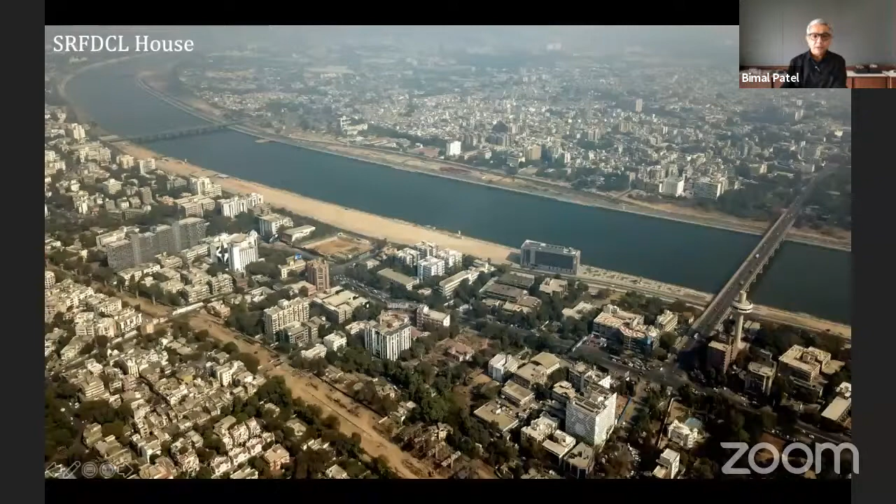So there'll be a series of buildings here. The entire area in the back, of course, over the years is likely to get redeveloped. You can see here another image of the building also.

Now, the entire project's construction cost is estimated finally to be just 1,500 crores. Presently, only about 850 have been spent. Relocation housing, I told you, is 1,000 crores. Interest costs will be about 750 crores because money has been borrowed to do the project.

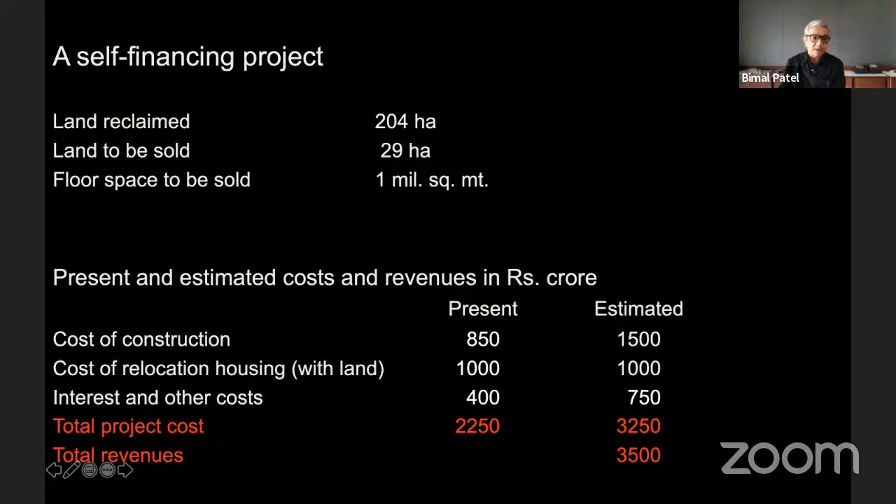Total cost will be around 3,200 crores, which is not much at all. And the total revenues from this project, from the sale of land, is estimated at 3,500. So it's a completely self-financing project.

In addition to this, the riverfront development is also generating revenue from sale of additional development rights along the river. You can see all these real estate projects coming up along the river are benefiting from the project.

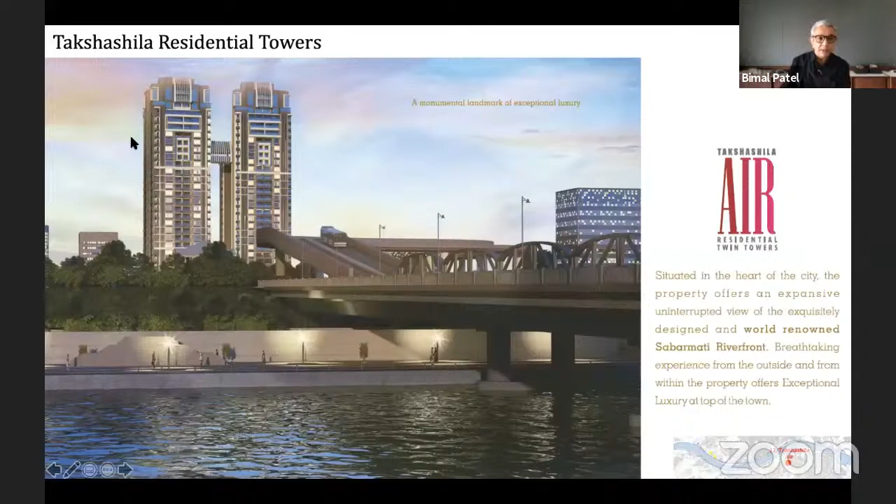You can see that they are benefiting from their brochures. These are brochures of real estate projects which say they are right along the riverfront. Here they are showing that this tower is next to the riverfront. Or here, this fellow saying his tower is next to the riverfront. Or here they're saying, listen, this is along.

They have a map of the riverfront showing where their project is. Here's another brochure saying this is the view you will get from your building, so on and so forth. Here's another one, still a real estate project. Now all these projects are benefiting from the riverfront.

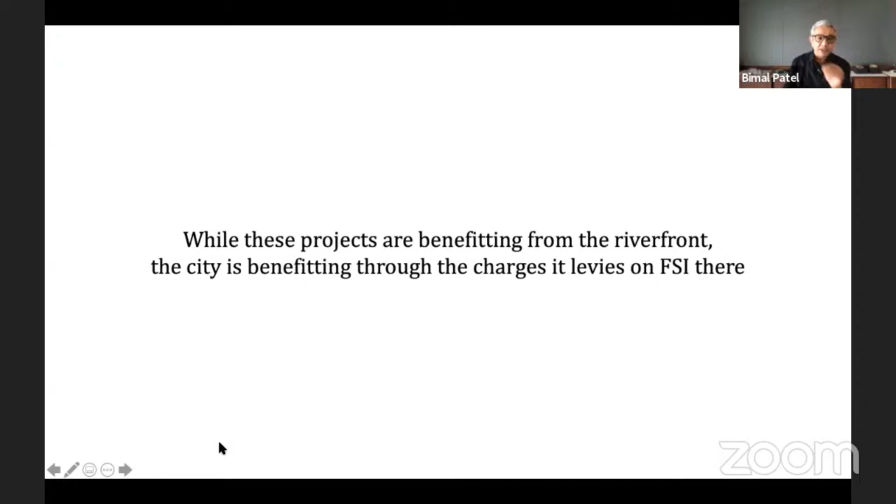The city is benefiting through the charges it levies on the FSI that these developers are using. So this developer, for example, has paid for some of the FSI of this building and paid 36 crores to get that FSI. Here's another one who has paid about 5 crores. Here's yet another one who has paid 20 crores.

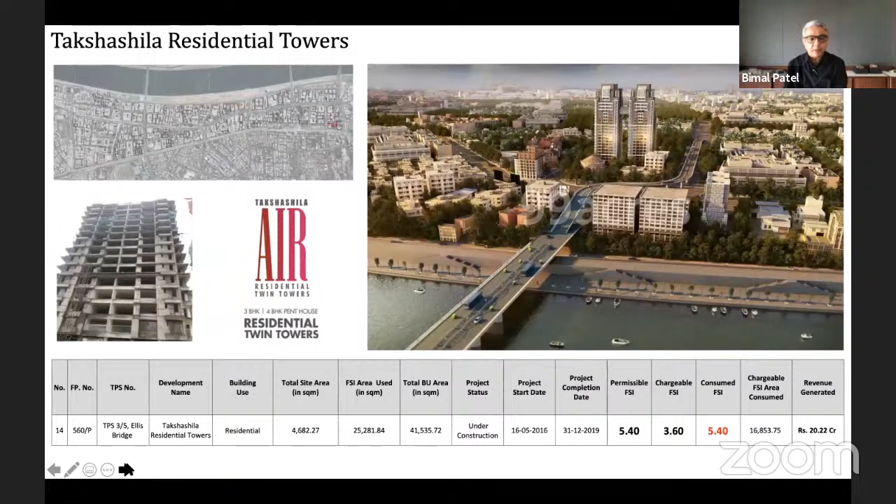Till about a year and a half ago, almost 164 or 165 crores worth of revenue had been got from sale of just these 18 buildings on the two sides. So that was another big objective of making it a self-financing project. Projects should not be thought of as just using taxpayer money, but you have to build into the design the mechanism for financing them.

Finally, the 11th objective was to bring Ahmedabad together around a large civic project, to build Ahmedabad as a city, build its capacity to tackle complex urban projects, and to show that even within a fractious, spirited democracy, things can be made to work.

This project just shows that we don't have reason to be despondent. We don't have to believe that things can't be done in India. Things can actually be done. It took a long time.

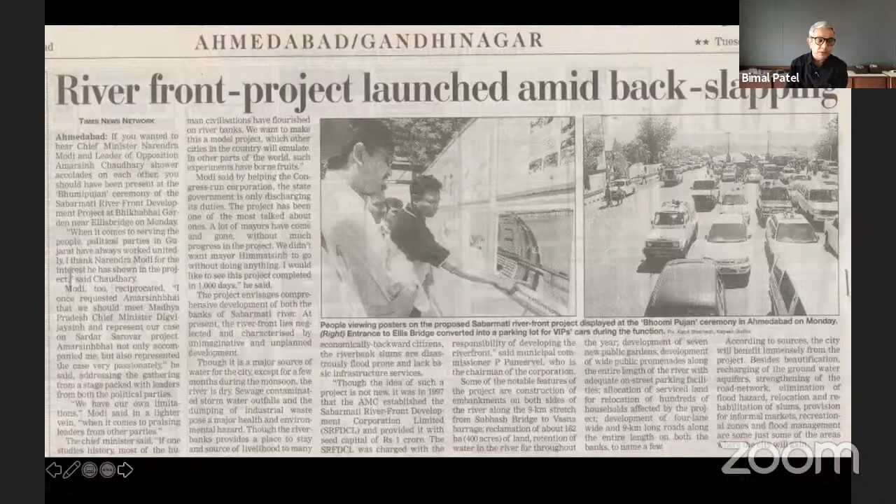Finally, in 2004, the project got going. The chief minister at that time was our present prime minister. He pushed the project forward. You can see him here inaugurating the project along with everybody else in 2004. These are people from the opposition and various people from his own party, all of them together.

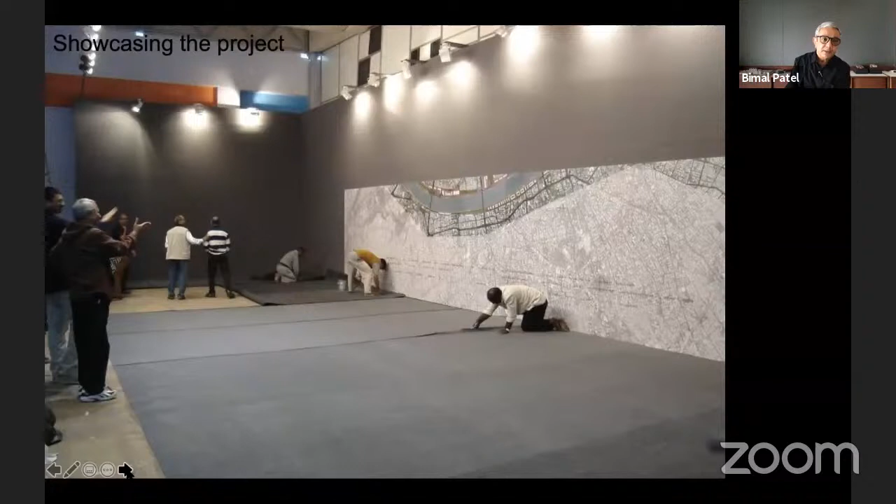Here was a place where we displayed the project during a state level fair. Here you can see a model of the project put up, a large drawing of the project at the back. Here are all the people going past, looking at the model, wondering what is going to come up.

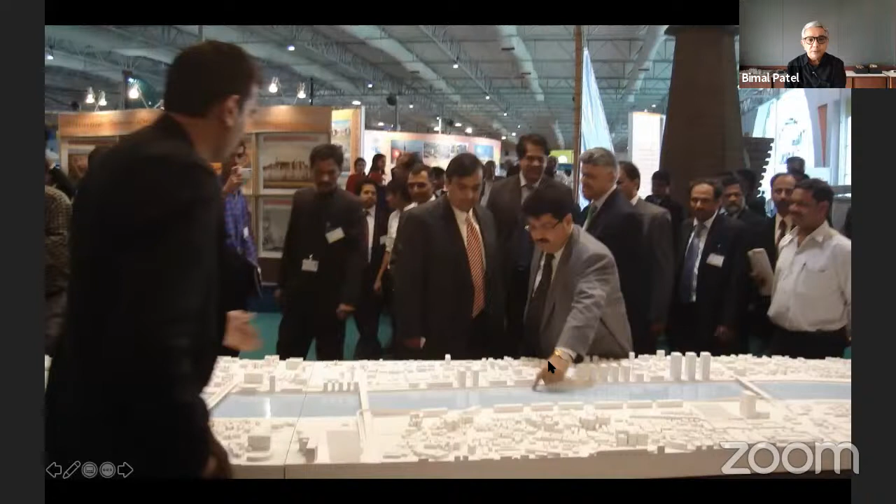Here you can see somebody you might recognize. This gentleman here is Mr. Ambani, who is being shown the project by Mr. Nathwani here, perhaps wondering what they're going to buy up here.

Then there were lots of court cases. There were, of course, advocates of all sorts, sometimes sensible, sometimes quite insensible, opposition to the project, environmentalists, sometimes sensible, sometimes quite bigoted and fundamentalist in their approach. There were people arguing against the rehabilitation of slum dwellers. The High Court was monitoring the project.

So you see, projects like this will necessarily be debated a lot, fought over a lot. But it is precisely in a democracy that you have to learn how to work with all of these forces.

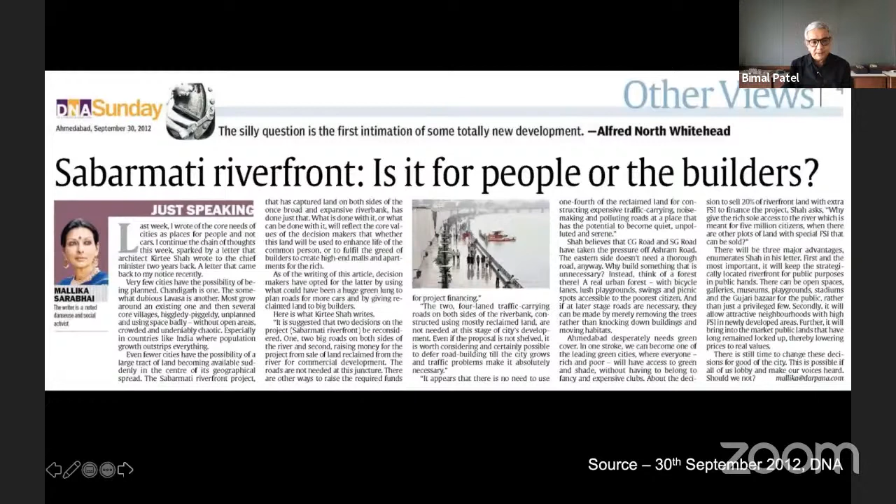Here is one lady claiming that this project is entirely for real estate developers. Of course, there was no such thing. Here is a rebuttal saying that there's more open space here. Only 20% of the land is being sold, and that too to pay for the project, not to make profits.

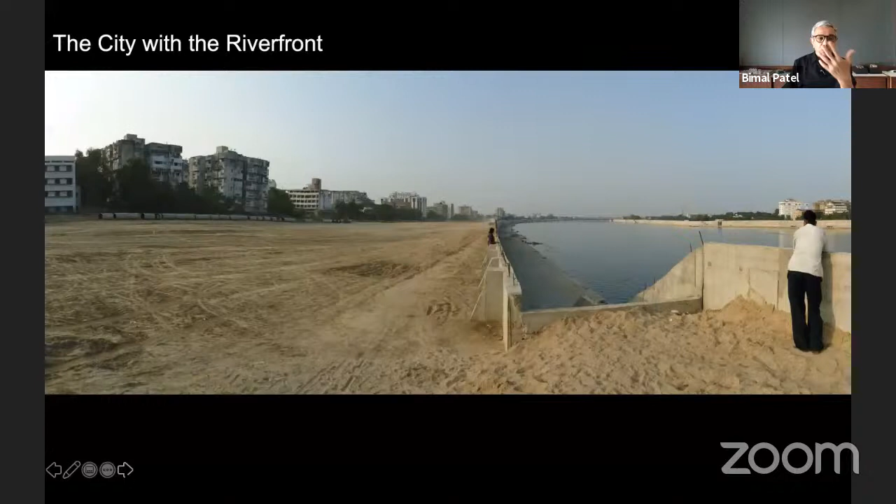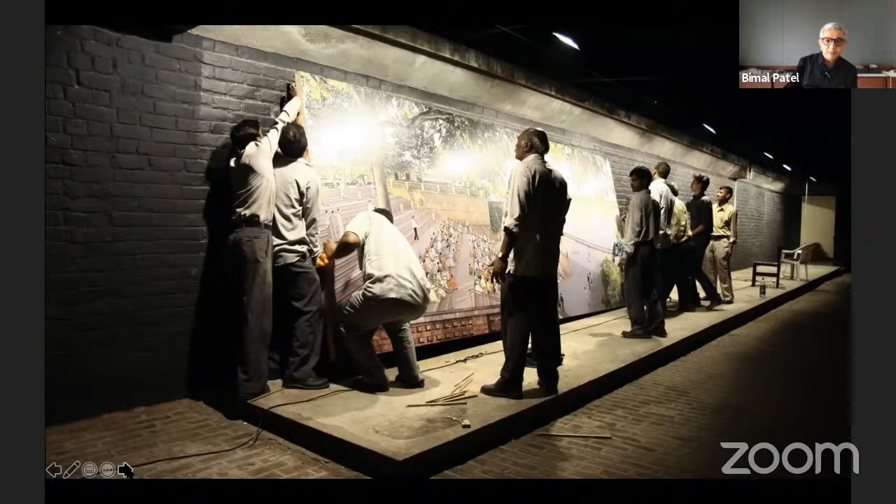For example, this one talking about the kite festival in Ahmedabad along the riverfront. Then we would make large panels like this, 20 feet wide, and people would come and see these panels in a large exhibition.

So that's what the project has been about for 20 years, bringing the Sabarmati River back to Ahmedabad, and Ahmedabad back to the Sabarmati River.

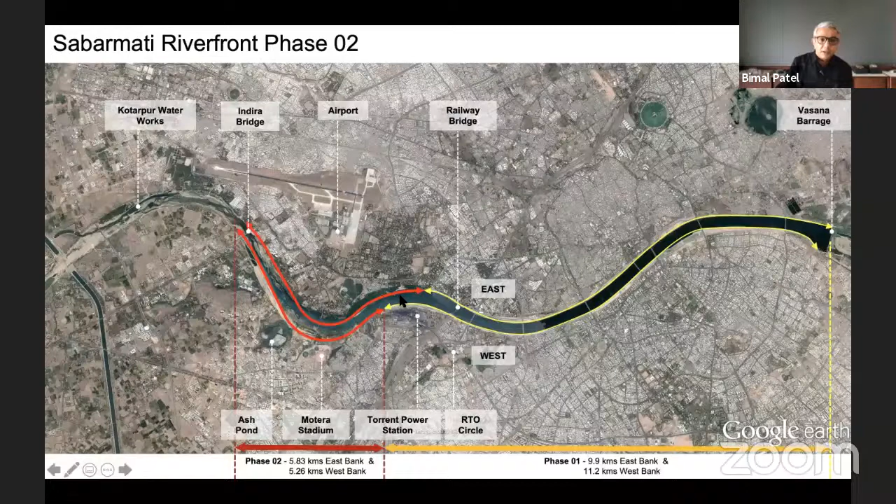The good news is that the project is being extended. So 11 kilometers of the riverfront has already been built. Another 5 kilometers is to be built. Here are some new renderings that we are doing. This time we are going to do a different type of embankment because it's outside the city, undeveloped land.

Thank you very much, sir. This was something, a very, very excellent work in this field, giving us a very good opportunity to come out with new innovations. As you rightly said, whenever innovation comes, there is always deliberation, democracy, as well as divergence of opinion. But I'm sure, and I've seen it myself, your project attracted city councillors, mayors, administrators across India and abroad. I've seen many of them going there, rushing to see what is happening in Sabarmati River. Personally, many have told me across from South Africa, from Europe, everywhere, attracted towards that and then seeing it. I know, as you said, okay, Sir Joseph has done some work in Thames.

Somebody has commented on Desi Manhattan. I'm sure, I don't know whether you can become, at least the government of India has given you a Padma Shri, which is befitting, equivalent to what is Desi Manhattan or Sir Joseph's work on Thames. You have done it in the case of Sabarmati River.